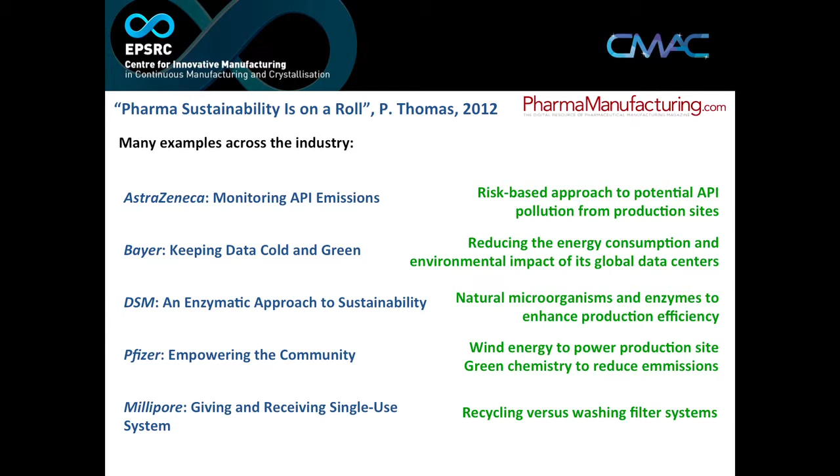We work quite heavily with the pharmaceutical industry, looking at pharmaceutical manufacturing, and looking through the literature, pharma seems to be pretty engaged with sustainability and associated agendas. A whole host of things: monitoring API emissions, pharmaceuticals in the environment being an ongoing issue, but also minimising energy consumption, so Bayer reducing energy consumption in their global data storage centres, through to Pfizer introducing wind turbines to contribute to the energy consumed on their sites.

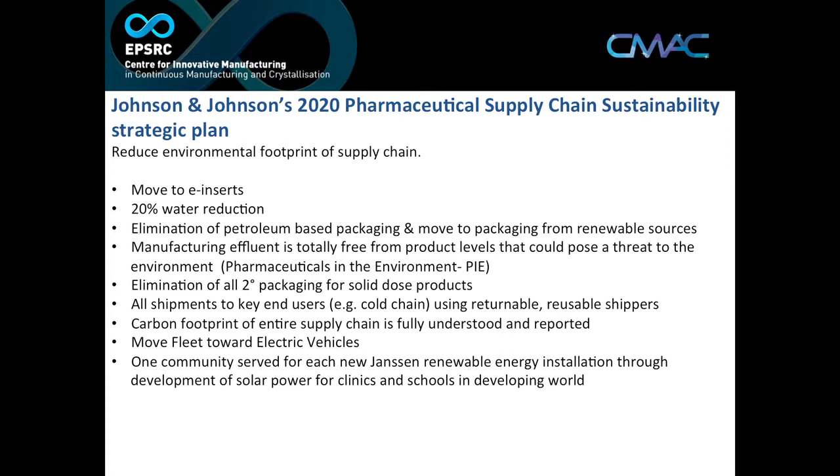So there's a very diverse range of activities going on, right through to Janssen or Johnson & Johnson's strategic plan looking at their entire supply chain. I've highlighted some of the bullet points from that plan in terms of the range of activities they're looking to drive forward. So there's a lot of activity. I think this is one of the areas where the pharmaceutical industry is making a lot of progress. But explicitly, we're looking at the manufacturing aspect and some of the challenges that the pharmaceutical industry is facing.

By way of context, industry's gone over the patent cliff. The market is changing. There's not going to be the same number of large blockbusters, so one molecule, huge numbers of patients, large volumes; instead many more smaller niche products. R&D productivity is down. So is the current configuration of the industry and the supply chain actually fit for purpose moving forward? There's a big focus within pharma globally on reassessing the current manufacturing infrastructure, particularly based on batch manufacturing approaches, and continuous is seen as a key tool moving forward.

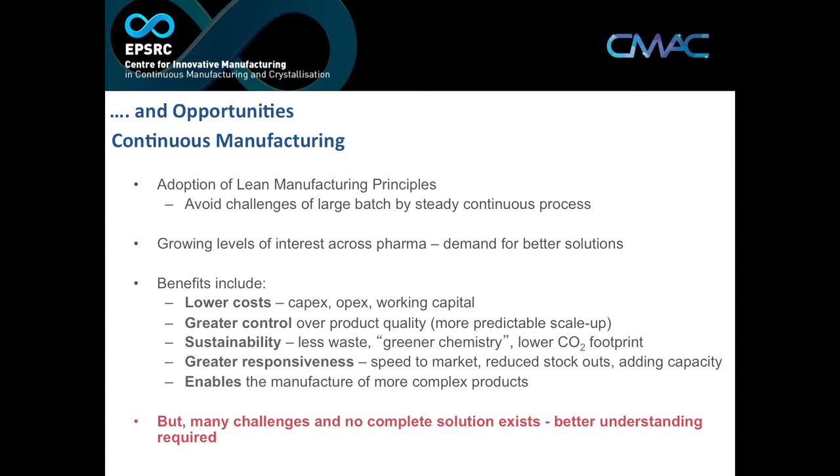So there are a number of anticipated benefits to be obtained by the adoption of continuous manufacturing. Reduction in costs, greater control, particularly more consistent product quality, impacts on sustainability, reduction of waste, reworking and so forth. Greater responsiveness: there's a big agenda around access to medicines in developing economies, but even in Western economies, if you look at FDA websites, you will see the number of drug shortages that often arise. And how do we address the technological challenges of delivering better performing products? So a range of challenges and expectations on the benefits, but there are not yet any complete solutions across the technical aspects of the manufacturing chain.

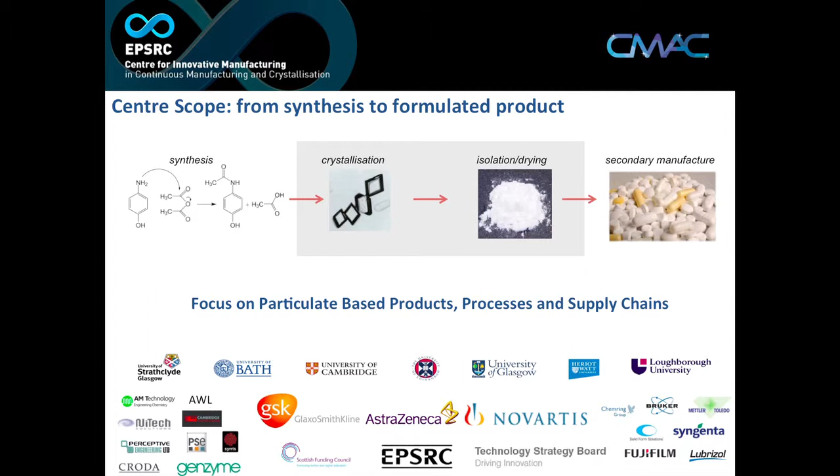Our centre's concerned with continuous synthesis through particle formation and isolation through to production of the final dosage form. But our focus is very much on the formation of the particles and their characteristics: continuous processing to deliver enhanced control of the particle attributes. And also an emphasis on the supply chain and the impact of adoption of these new technologies. What impact will that have on the supply chain configuration? At the moment we've got 7 universities as partners in the centre, 3 Tier 1 founding industrial members, GSK, AstraZeneca and Novartis, and a range of technology companies that we work with.

So why particles and crystallisation? It's ubiquitous in many chemical operations, as it's fundamentally a very powerful purification technique. But we're looking for a crystallisation process to deliver a whole host of different attributes. Purity being typically essential for pharmaceutical processes, but there are a range of other particle attributes: the crystal form, the size, shape, yield, and so on.

So these are not independent responses, but if we can manage to get better ways of controlling that through rational design, real-time control, then we can deliver enhanced consistency. And that starts to feed into getting the product right first time, reduced reworking, rescheduling during manufacturing. So that's what we can do if we get it right.

If we get it wrong, perhaps one of the most famous examples was from Abbott in the late 90s, an HIV treatment that despite the fact it had been on the market for nearly 2.5 years, a new crystal form appeared unexpectedly in the manufacturing process. It was more stable thermodynamically, less soluble, and therefore less bioavailable. It had a lower therapeutic effect.

So they had to withdraw the entire product and reformulate before remarketing. So there's also a big commercial impact and also a massive impact on the patients who are actually receiving that treatment and were being well catered for by it.

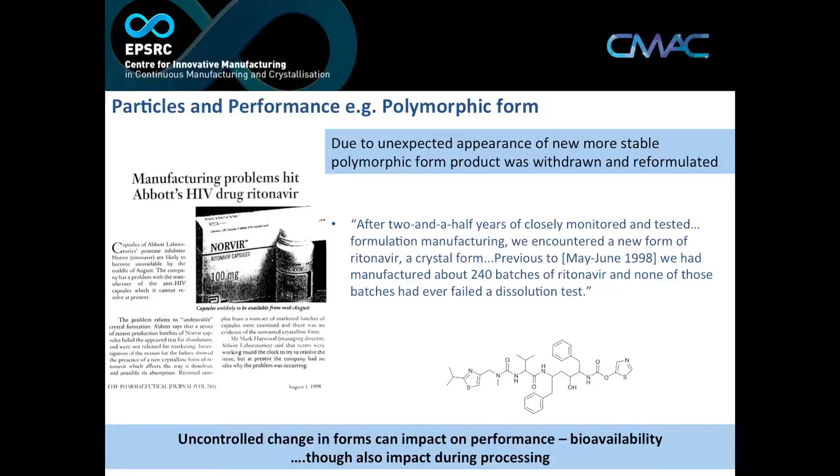So the notion of crystallisation being a sort of facile process, just mix stuff together. You've all grown copper sulfate crystals in primary school. I personally did it in the Cub Scouts. They don't allow us to play with copper sulfate anymore, but you know, it's quite easy to do. But in terms of getting the exquisite degree of control that's required by advanced processes and products, there are some big challenges to overcome.

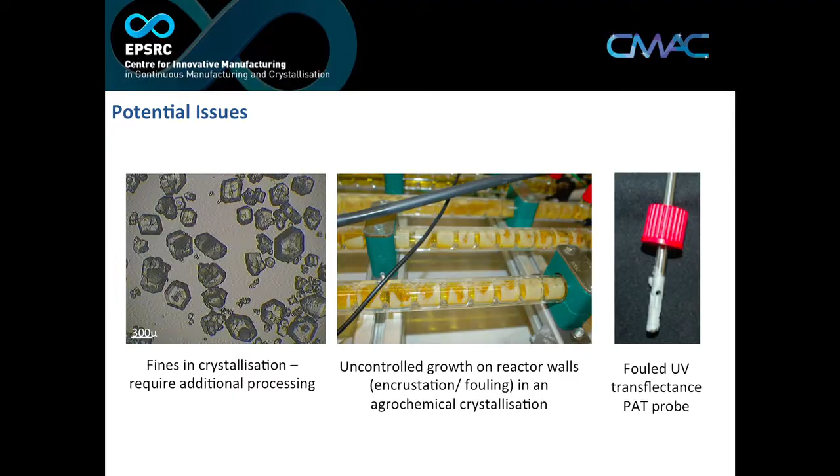On the right-hand side, this is a probe that we're using to monitor changes in concentration. And we see the build-up of material on the surface of that. So again, we lose control of the process. We are then blinded in terms of what's happening in the process.

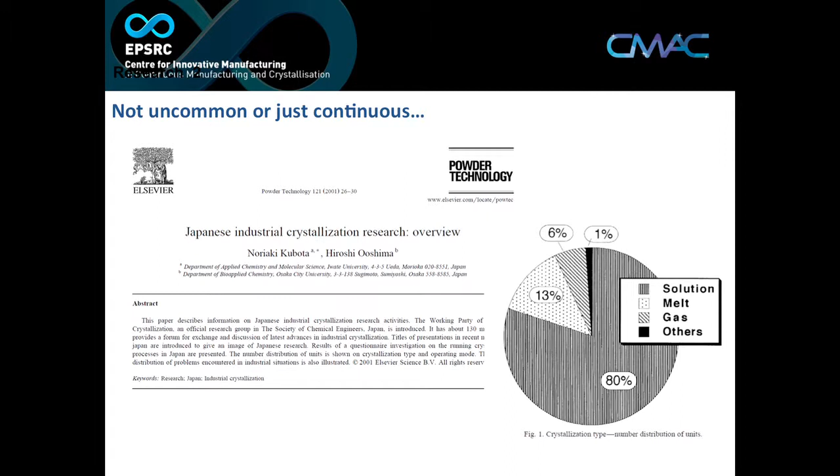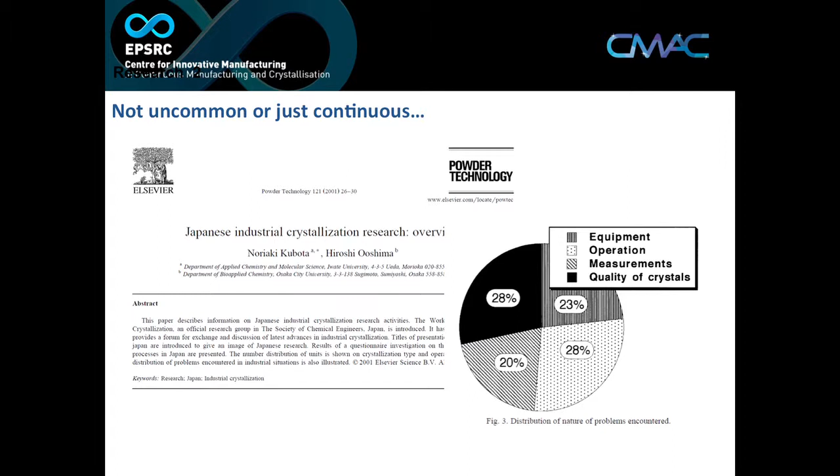So it's not particularly uncommon for having problems with crystallization, and it doesn't just affect continuous processing. There's not that many good information sources collating problems in the literature. This article from Powder Technology, looking at examples from Japanese industrial crystallization, a whole range of different types of crystallization, not just from solution, but from the melt and vapor phase as well. What are the sources of the types of problems? Quality of crystals, accounting for a large number of problems.

And then a range of issues highlighted in terms of the equipment that's actually the root cause of some of these issues. So I guess for us in the centre, this is all that context. These drivers were from the discussions we were having with industry, what arrived at the focus for a centre around the formation and control of particles and continuous operation, being able to create some enabling capability and technologies for industry in meeting some of its goals.

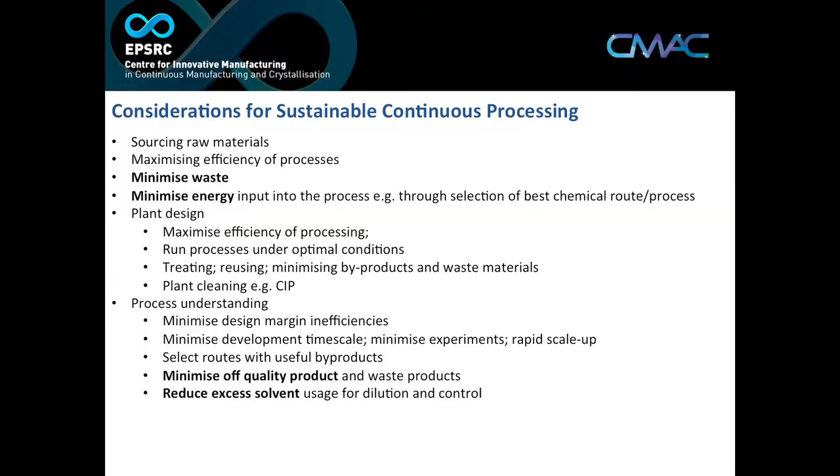So these are some generic considerations in terms of sustainable continuous processing. I've highlighted in bold minimising waste, minimising energy, minimising off-quality product. Those are probably the areas that we're most directly engaged with within the technical programme at the moment. Some activities starting to extend beyond that. But again, I'd be interested in hearing views from colleagues here in terms of where can we do more, how can we do this better.

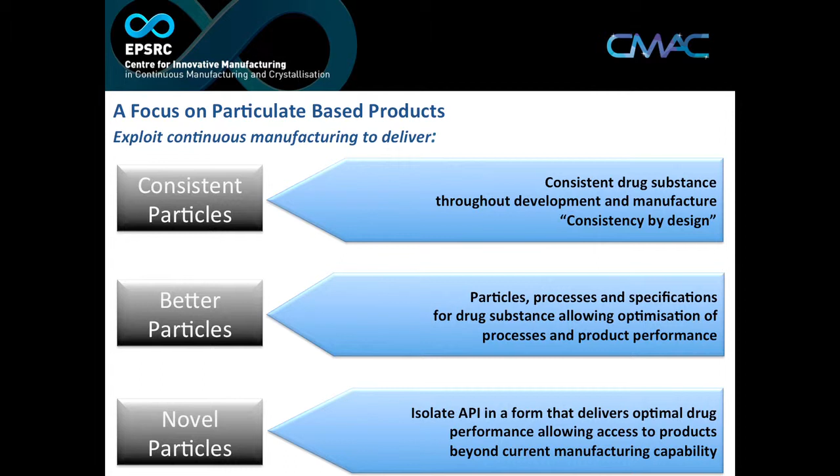So there's a sort of timeline emerging from moving from the current manufacturing processes, how can we improve on that to deliver more consistent particles, reduce variability between batches by operating at a controlled steady state in a continuous process. Can we then start to get better particles, reduce the tolerance on our specifications, reduce the need for additional operations such as milling to control particle size. And also then can we start to, as we get better understanding of the capabilities of these technologies, deliver better function in our particles.

So really just next few slides I've got some examples of some of the technical aspects ongoing in the research programme within CMAC, just trying to highlight some of the generic challenges and some of the areas where we're making progress.

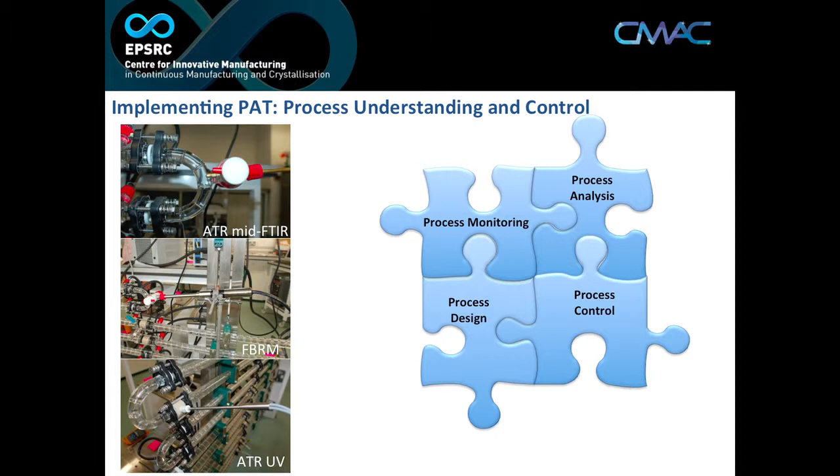We've colleagues at Strathclyde University and Loughborough University who were successful in winning one of the EPSRC ICT programme awards last year for intelligent decision support for continuous manufacturing crystallization. So there's a team of researchers who are looking at how these existing sensors that are commercially available, how can we get more useful information from the signals that they are providing. So again, looking at building the portfolio of activity around the core centre programme.

I think also, you know, building on this theme of partnership, which I'm sure when we welcome you up to the National Manufacturing the Future Conference next week. I think it's next week, isn't it? In Glasgow, that we happen to be hosting, and I should know the date intimately. You know, we will still be talking about partnership, but from a national perspective rather than an international one.

But within the centre, with the range of technology companies that we work with, this need to identify ways to develop process understanding quickly, a systematic approach to characterise the system and understand the operating space that we need to work within to deliver the continuous processes. We've worked with a number of companies to deliver this. This is actually a batch crystallizer unit, but integrated with multiple PAT probes to essentially allow us to do automated DOE, or design of experiments, to gather that information in a short-term automated approach.

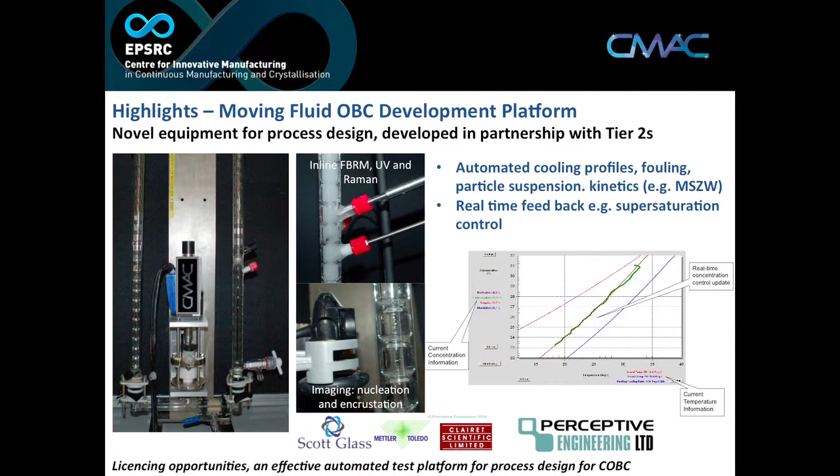This chart here just showing at the end of this, the system is able to crystallize the material in solution under defined conditions of supersaturation. So we can dial in the conditions, the driving force for subsequent particle growth. And again, the centre's allowed us to do that by bringing the multiple stakeholders together and capturing that expertise in a focused way.

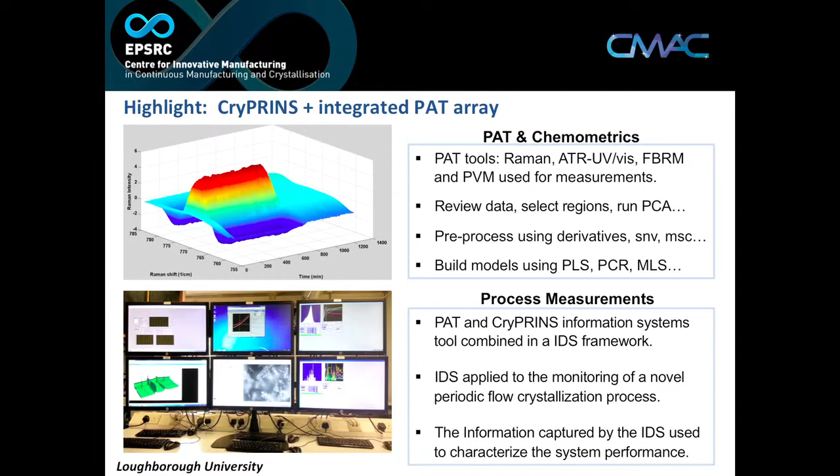In terms of some of our academic partners, so Chris Rielly and colleagues at Loughborough University, so this is a crystallisation process informatics platform that again is aiming to deliver similar capability, a suite of process analytical tools so that we can monitor crystallisations, vary the conditions and understand the response of the system. At Loughborough there's a big interest in developing first principles physical models for complex crystallisation processes. So as those models are being developed, delivering the infrastructure to allow us to test the deployment of that against our stated targets, better particles, novel functionality.

Also, one of the challenges, one of the appealing things about batch technologies is that it's a reasonably forgiving technology. Things go wrong, you can dilute, you can heat, redissolve. In continuous, you need quite a supply of material at the scales that we are typically operating at for crystallization. Very small channels and particles can be a bad marriage. Particle blocks channel, process completed. But scaling down so that we can again get the information from the minimal amount of material.

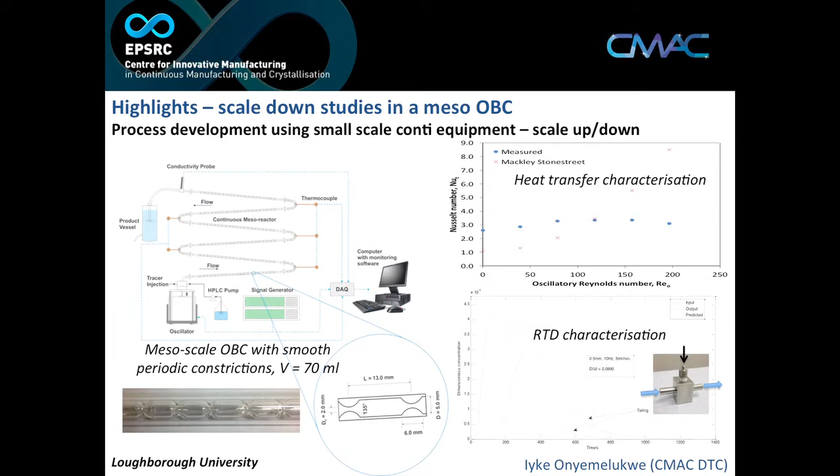So again, this is more work at Loughborough. Mesoscale, continuous, these are plug flow reactors, characterizing the performance of the reactor. So again, we can develop crystallizations at small scale and get over some of the barriers in batch about rapid scale up to meet demands, potentially unknown demands for product development, where you go through clinical trials, the project may die completely or may actually scale up to a large patient population or a smaller, more niche patient population.

For manufacturing, going back to the initial slide, the introductory statements from the MIT CMAC seminar, is the current manufacturing infrastructure in pharma actually fit for purpose for the upcoming needs?

So again, colleagues at Strathclyde looking at developing new approaches for continuous generation of seed particles. This is essentially a precipitation process, but we need to tightly define and control the initial particles formed so that we can then grow those to the required attributes.

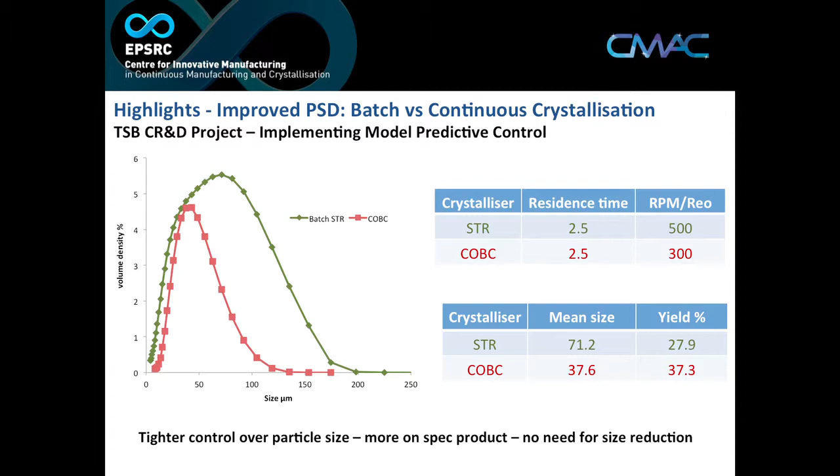That's a particle size distribution, so you see the mean round about 70 micron, but a very broad spread. For pharmaceutical applications, you're often looking for very specific size ranges. So of that product, you then sieve it and take specific fractions. What we are starting to be able to get towards is a much more selective approach so that all of the product meets the requirements of the intended application. So again, in terms of getting the right product first time, starting to be able to demonstrate how continuous can contribute to that agenda.

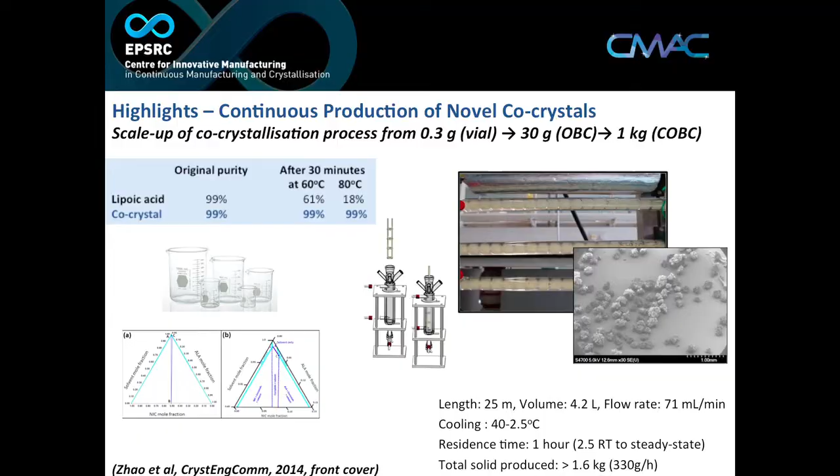In terms of novel materials as well, this is another example. The yellow tubes here, again, these oscillatory baffled reactors, plug flow reactors that we're using for crystallization. And the SEM image here just showing some of the particles produced. This is a novel organic material that overcomes thermal instability in lipoic acid, using continuous processes to deliver consistent products with enhanced properties over the starting materials.

I mentioned in the scope at the outset that we also have an interest beyond just the crystallization step. So what are the influences of upstream processes, synthetic steps, variations and impurities? Those can have dramatic effects on the rate processes controlling crystallization. But also the particles that we produce ultimately need to be translated into dosage forms, tablets, creams, capsules, injections, something that we can administer to patients to deliver therapeutic effect.

This is an example from colleagues at Strathclyde looking at hot melt extrusion processes where we're taking the crystals. On the left-hand side you have a diffraction pattern showing the ordered structure of the particles, and hot melt extruding that with polymer to give us a molecular dispersion that's delivering enhanced dissolution performance across the range of pHs you'd encounter in the gastrointestinal tract.

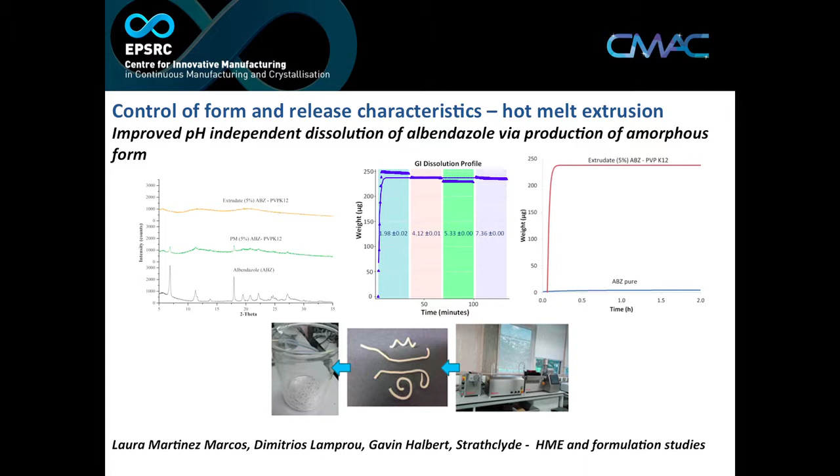The plot on the right just shows the difference in total dissolution obtained from the raw crystalline material with how we can change the performance of the material by using extrusion with a polymer to get significantly greater release. So the consequence of that is, of the dose administered to the patient, a greater amount is available for absorption, less excreted directly into the environment as well.

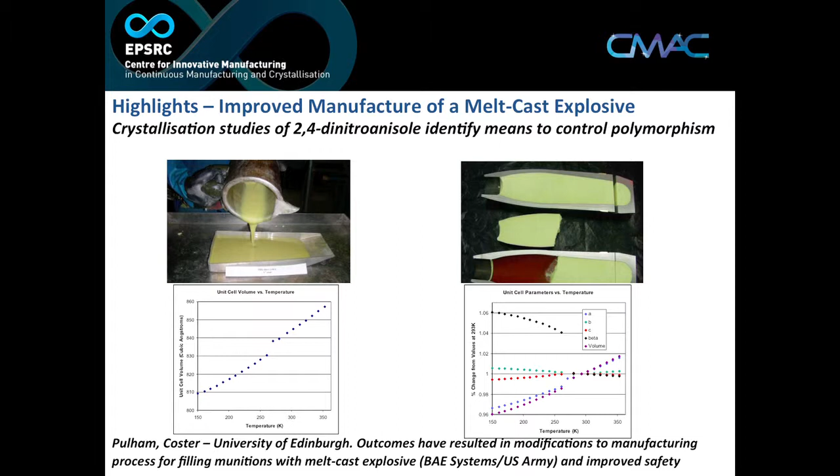We have an interest not just in pharma, we have a massive focus in pharmaceuticals, but a range of other high-value chemical industries. This is some work from colleagues at Edinburgh University in the centre, where understanding the crystallisation process allows you to deliver better control over these melt cast explosives. These are energetic materials. They're highly polymorphic. They're filling the munitions with the molten material, but over time those transform, they crack. That impacts on the detonation kinetics, their stability, the safety of operation as well. So that's actually already been implemented in terms of changes in the commercial manufacturing process.

In terms of engaging with the supply chain challenges, this is work led by IFM, Jag Srai, and colleagues, looking at the drivers and opportunities. There are a whole range of expectations for continuous. Continuous is nothing new in oil and gas, for example. But how does it apply in the pharmaceutical context? Highly regulated, different demands, a very different way of currently working. So we need quantitative analytical frameworks to allow us to assess different configurations and test and model that.

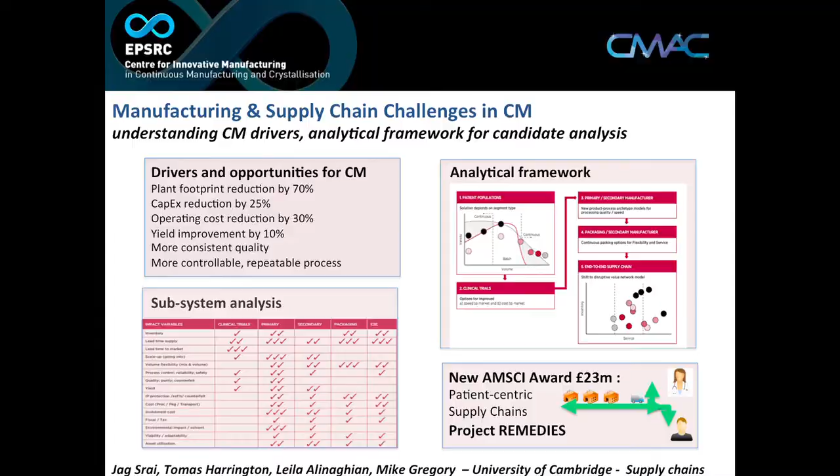Moving forward, earlier this year we were successful in securing one of the Advanced Manufacturing Supply Chain Initiative awards. This is Project Remedies, which is reconfiguring medicine's end-to-end supply chain, if I remember how we've arrived at that acronym. That's a new program led by GSK, and we'll be looking to develop and build on some of the emergent work from the centre.

In terms of technical highlights, a big focus on process crystallisation, crystals doing their thing and how we monitor and play about with that. But how do we exploit ICT? Steve mentioned later on today hearing more about the role of data management, big data, and so on.

So within our space we have a distributed centre, geographic distribution of researchers. We've implemented in our doctoral training centre an electronic lab notebook, but also through the ICT programme looking at automated workflows around that, so that every researcher benefits from the development of methodologies and tools that are happening across the centre. So this has been rolled out last year, the automated workflow part.

So when a student or a researcher comes up in the lab, they are guided through the development process for continuous crystallisation. They can invent or develop their own unique experiments if they need to. But in terms of a systematic approach, it allows us to really obtain some significant advantages from a centre point of view in building up that knowledge base.

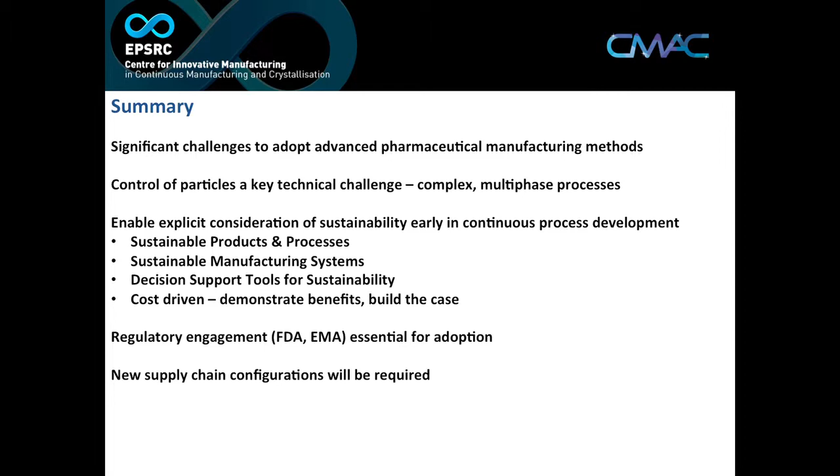The current end-to-end cycle time from receipt of raw materials to packaged medicines being available to a patient can be a couple of years for some products, and that's with a carbon footprint that involves transportation around the world. If you reduce that cycle time using integrated end-to-end continuous processing to 10 days or 20 days, the current supply chain just is not configured to cope, adopt and manage that. So big challenges there.